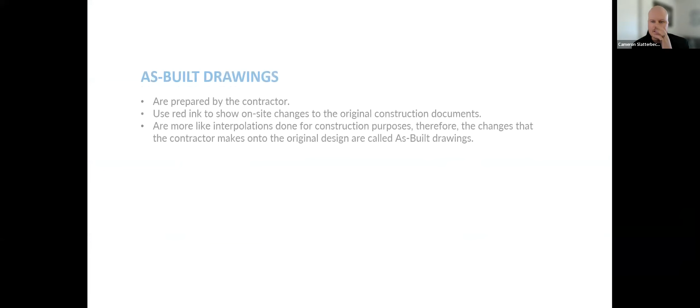Some common definitions. When looking into the actual definition of as-built plans, what one will most likely find is a definition that concerns as-built plans being created after or during new construction or after or during a renovation. They're prepared by the contractor, who potentially uses red ink to show on-site changes to the original construction documents. They're more like interpolations done for construction purposes. Therefore, the changes that the contractor makes onto the original design are called as-built drawings.

And then we have record drawings. Contractor developed as-builts should not be confused with record drawings created by you, the architect or engineer. Record or archive drawings often include the information gathered on as-builts and are the final set of formally developed prints, fully signed and stamped by the project engineer. This definition reads that they're prepared by the architect or engineer, and they reflect on-site changes the contractor noted in the as-built drawings, often compiled as a set of on-site changes made for the owner per the owner-architect contract.

And this set isn't always mandatory. It's not necessarily created, but in general, some formal architectural services create these as one of the last tasks of a building project.

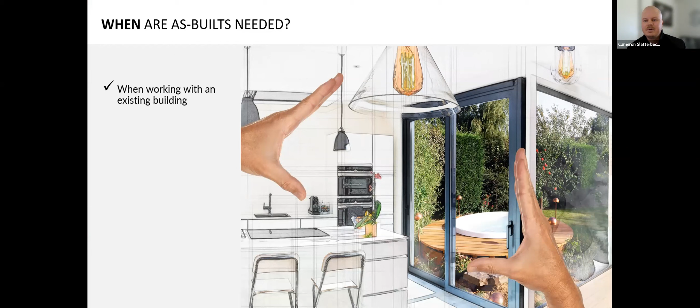So when are as-builts needed? What are the contributing factors? Pretty much whenever we're working with an existing building, we need as-builts before starting design. Also, when existing plans are determined to be unreliable, you'll probably need as-builts. Also, when there are no existing plans. And then finally, maybe if you work in a particular software and existing plans only exist in paper format.

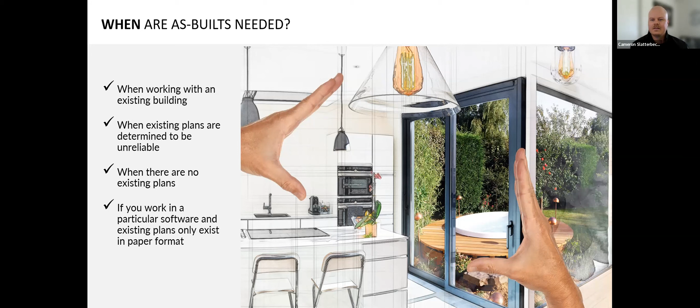If the owner or client happens to already have as-built drawings, then we may just need to enter those into CAD or reformat them if they're already in CAD, and confirm that the drawings are up to date. If errors or inconsistencies are found, which we've found is quite often, then at some point you may just decide that a fresh set of as-builts is needed.

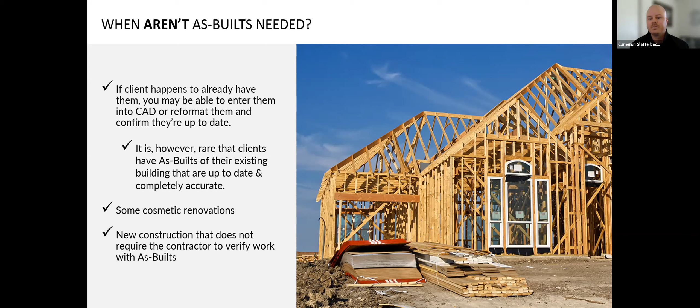And now, when aren't as-builts needed? It is rare that clients already have current as-builts of their existing building that are accurate, as I mentioned before, but it does happen. In that case, of course, you would not need more before starting your project. There are also simple cosmetic projects that don't require having accurate as-built plans. And of course, if your building is being built from scratch, then all you need are those new construction documents.

And so when is the best time to obtain as-built plans?

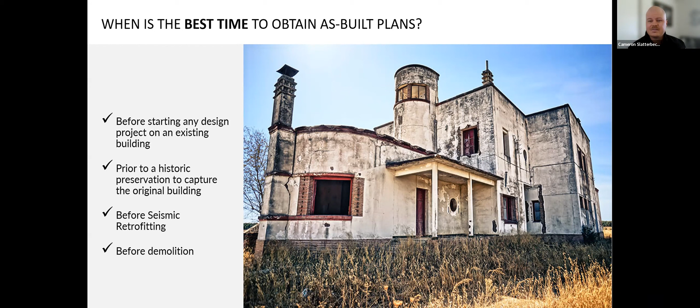In most cases, obtaining as-built files is one of the very first steps in the renovation process, if not the very first step. Getting ahead of this step allows an architect to focus on the design, plan creation, and submittal to the building department, all of which are considerably more time-consuming than that first step.

There are also cases where you'll be working with historical review or something similar, and they'll require as-builts to be created. Most engineers will want a fresh and accurate set of as-builts before they begin, say, a seismic retrofit project. If you're working on a teardown project, some building departments even require you submit as-built plans of the structures being demoed.

Overall, the size and scope of your project will determine when as-builts are needed, and as we'll discuss in the next section, to what degree the detail and scope of as-builts are required.

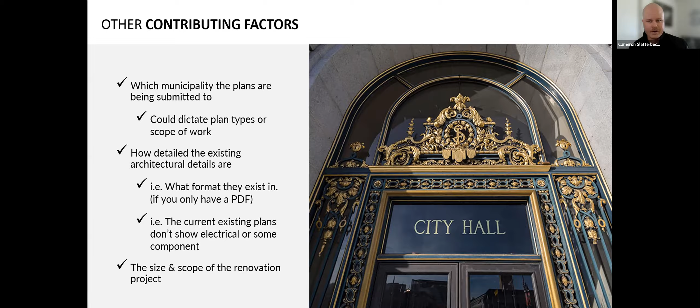So you've discovered that as-builts are needed. You're going to need those as-builts. So how far, or in how much detail, do you now need those as-builts or that information to go?

Above are a few examples of plan types and when they're needed in your as-built plan set. You might need floor plans — you almost always will need that as a base plan to work from.

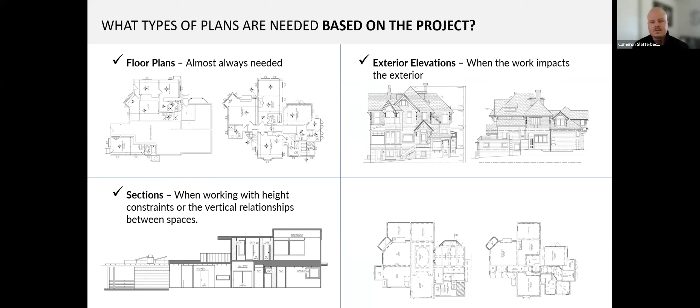You might need exterior elevations when the work impacts the exterior facades of the building or structure. Sections are also common when you're working with height constraints or vertical relationships between spaces. Finally, one of the more common plan types is reflected ceiling plans — when you're modifying the existing lighting or working with unique ceilings, that's definitely common.

Ultimately, it's up to you as the architect to decide what the scope should be for your as-built plan set, or consult with your engineer as well on what is needed.

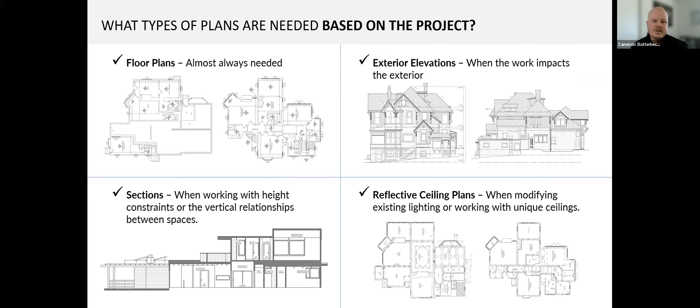Before we get into specifics regarding plan types, let's go over some of the ways to gather on-site information, starting with a very simple, quick method, and ending with full-blown as-built plans.

So now we know what we need, we know why we need it — now, how do we actually get it? The first potential step would just be getting photos only. One way to obtain the answers you need on site before renovation is by simply taking those photos. This can assist in the design process and answer questions you might have before proceeding.

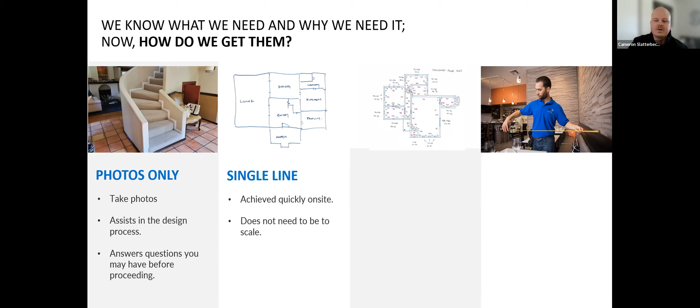Next up would maybe be a single line diagram. Sometimes a quick single line, or even a bubble diagram, is all you need to achieve your goals. This can be achieved quite quickly on site and doesn't necessarily even need to be to scale.

Beyond that would be sketching. Sketching can be very helpful in supporting your design. In the case of interior elevations or perspectives, this can also be done roughly and may not require measurement.

Finally, measuring. If drawings need to be to scale, such as when they'll be used to create construction documents, then you'll need to go to a higher level of accuracy and measure the existing conditions entirely. How you get these measurements can vary quite a bit, as you'll see throughout this presentation.

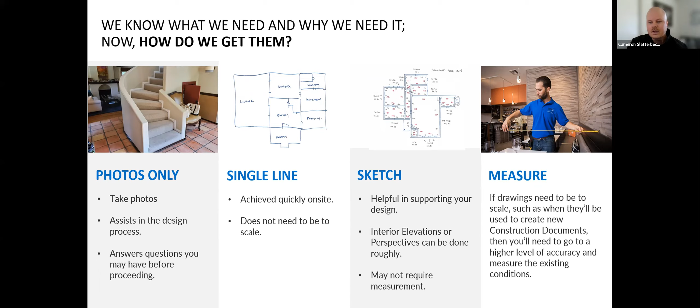Most remodel projects require a more detailed scope for as-built, which will give you a head start in the creation of your design, submittal, and construction documents.

To sum up the first portion of the presentation, chapter 1, understanding as-built plans: as-built plans, simply defined, are a set of plans of any structure as it exists at that moment. They're most often used for a renovation of some type.

Also, getting as-built drawings in the format in which you work is incredibly important, such as a particular software. Finally, the scope of the as-built plans and the detail of each scope item will vary with the needs of your project.

Now let's jump into chapter 2, which is going to touch on traditional surveying methods. We'll talk about an as-built production method that's near and dear to many of our hearts here at PPM. This is how we started 20-some-odd years ago, and that is sketching.

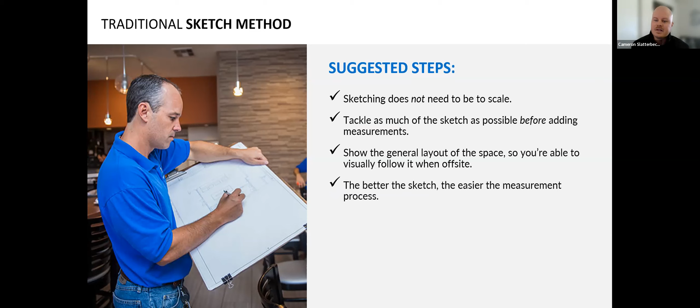So here's how you might sketch. Remember that sketching does not need to be to scale. All you need to do is make sure there is room to write all the measurements you need, and that it is visually easy enough to follow back in the office. Using different colors to mark different measurements and drawing types is helpful, so your eye will catch each segment accordingly when drafting, and you don't spend as much time hunting around the sketch for what you need at that moment.

Getting as much sketching done as you can before measuring is highly recommended, so you can just focus on measurements when the time comes and simply execute that. The better your sketching is, the easier your measurement will be. If sketched correctly, any structure could be measured much quicker.

Leave room to write in measurements. That's a big one. So plan ahead also to get your heights or measurements on the Z-axis. Most of the time, this information can still be displayed in plan view, but occasionally you'll want to sketch in section or elevation view as well. We'll talk about that again in the next few slides. And finally, sketch out any details or ornamentation to the degree of precision you desire, to be able to add measurements later on.

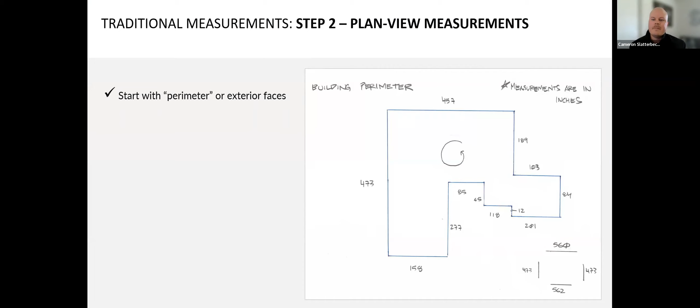So now it's time to add measurements to your sketch. An important step that many people skip when measuring a structure is going around the exterior faces. We find this incredibly crucial. Oftentimes, a wall thickness at an exterior wall is taken and then you simply move right onto the interior and take those interior measurements from there. But we consider this exterior footprint measurement to be extremely crucial.

A quick tip with this, as you see on this sketch in the bottom right corner: check your work, add up all the X values and all of the Y values. If you sum up all the X values on each side of the building, and those add up to the same number, or at least very close, then you're on the right track. As you see, that says 560 versus 562, and then simply do the same for the Y values as well.

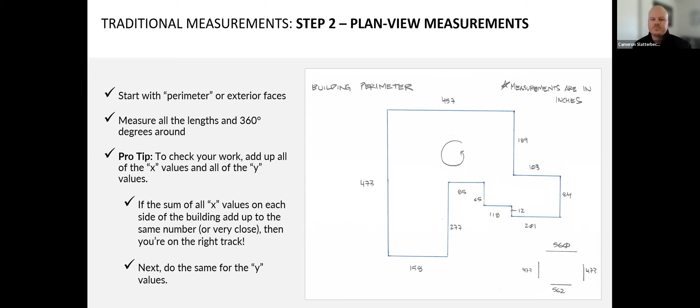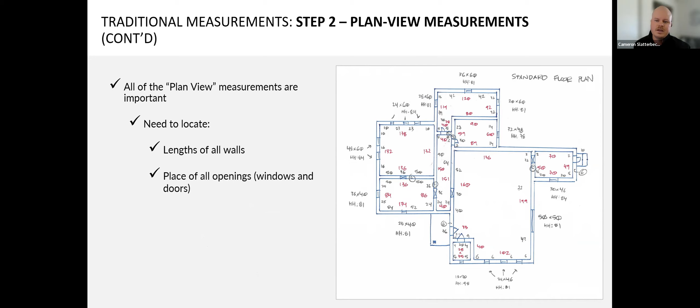Now in this sketch, you may notice there are some overall measurements as well as small incremental measurements. This is a good system of checks and balances that will not only improve overall accuracy, it may save you in the event you have an incorrect measurement or notation.

Don't forget to get good photo coverage as well. That'll help you verify that what you are drafting is indeed correct. Occasionally it happens—we've seen errors that do happen, or appear as errors or don't appear as errors on paper, but then become very obvious when you fact check or verify that with a photo.

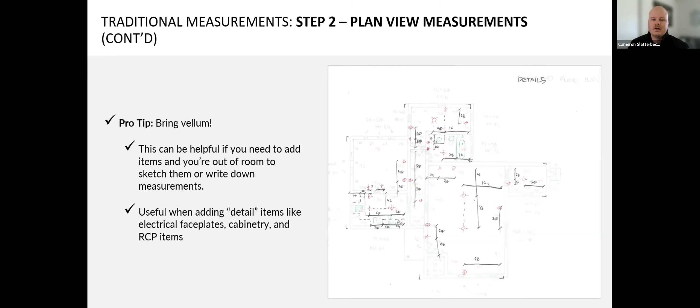This can be super helpful if you need to add items and you're out of room on that previous sketch and need to write those down. Or it's also useful when you're adding detail items like electrical faceplates, cabinetry, RCP, things like that.

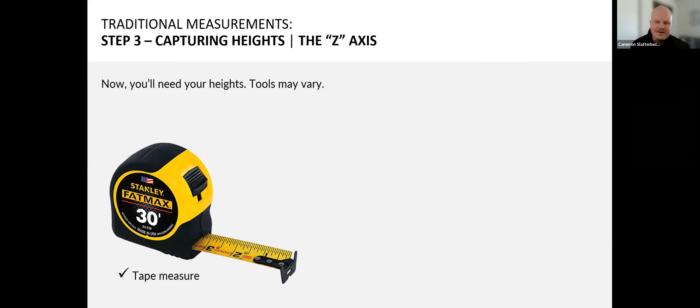So the Z-axis—now we can talk about collecting those height measurements or height information using traditional methods. This one's pretty obvious: you can use a tape measure to measure all the risers and the stairs, drop it down a balcony, run it up a wall, etc. We've all used that. A laser distance meter or disto can perform trigonometric functions instantly and get you heights in all sorts of ways. These first two, of course, are tools you might already be using to measure all other aspects of your plans. But the third is used exclusively to gather height information, and that is the zip level.

This is an excellent tool, invented, distributed, and repaired if needed by a company out in San Diego. I'm actually not even aware of any other version of this tool, but it basically uses displacement to read heights anywhere within a 50-foot radius. Super helpful when you're getting that height, Z-axis information.

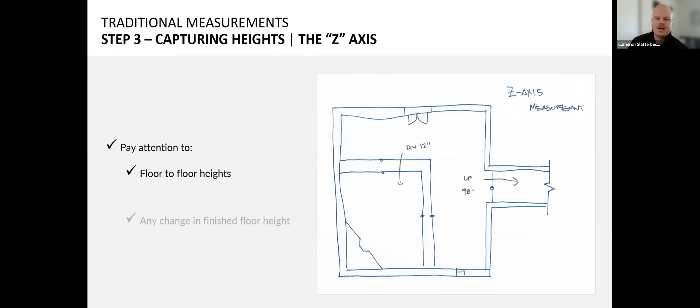However you collected your height measurements, make sure you got them in the places that you'll need them. Most of the areas will be obvious, like the tops of any steps, staircases, floor transitions, things like that.

Plan on what you'll need to see in those exterior elevation and section views. Make sure you have either some basic height and pitch information for your roof, or if it's safe to actually get up on the roof, gather as many height measurements as possible while you're up there.

Make sure not to forget the heights of openings such as windows in areas you plan to show, or the heights of items like wall sconces if you plan to produce detailed interior elevations.

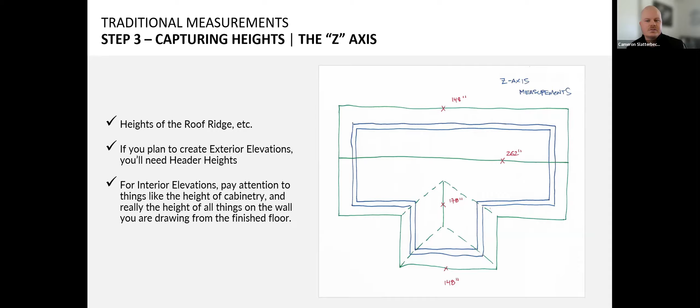To sum up the second portion, traditional surveying method, overall, having the perfect sketch isn't even all that important. What you need is a sketch that displays and contains all the measurements you'll need for the drafting phase. You need to encapsulate the structure by measuring around it. This will give you the scale when you begin drafting and ensure your interior measurements are correct as well.

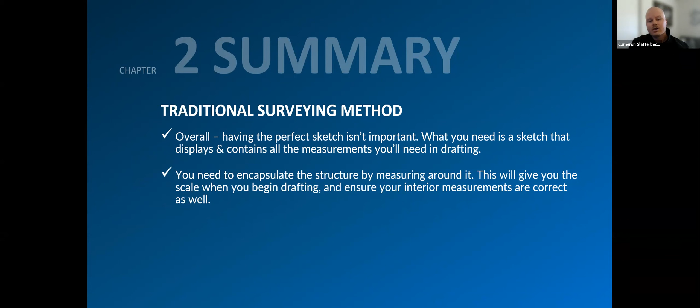After taking the measurements of major items like walls, doors, and windows, go ahead and move on to the next level of detail as needed. This can be for cabinetry, plumbing fixtures, electrical, ceiling components, etc.

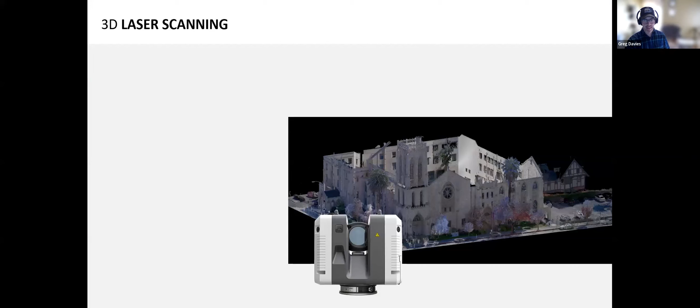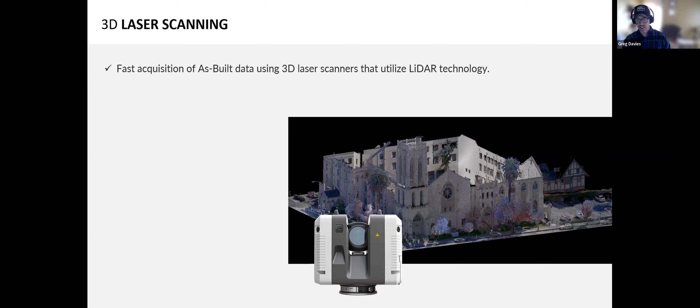Updating or even replacing a proven method for doing something to utilize the newest technology is not easy, no matter what industry you're in. The first step you take is always the most important, and the rest is just hard work and diligence from there. Even though it may be difficult to transition, making the change to laser scanning as a survey method provides you with fast acquisition of as-built data using 3D laser scanners, and more accurate measurements than can be taken by hand, primarily just by reducing the odds of human error in the field.

Technology can be purchased, rented, or even contracted as a service. It's a thorough solution that allows you to gather more data than needed to complete the drawings and models. And it provides you, even after you finish the drafting, with a digital twin of any property that allows you to essentially visit the site from the comfort of your office and pull up additional data if the scope of the project changes or you need additional info.

After scanning hundreds of individual positions with good overlap between all of them, you can bring all of the data into one big data set for your project. Now, the mobile scanner allows you to get a similar end result. It gives you that full 3D picture, but by utilizing an algorithm called SLAM, which stands for simultaneous localization and mapping, the scanner and accompanying software allow you to gather the 3D data while simply walking through a space. As you can imagine, this dramatically reduces the amount of time to capture the data in the field.

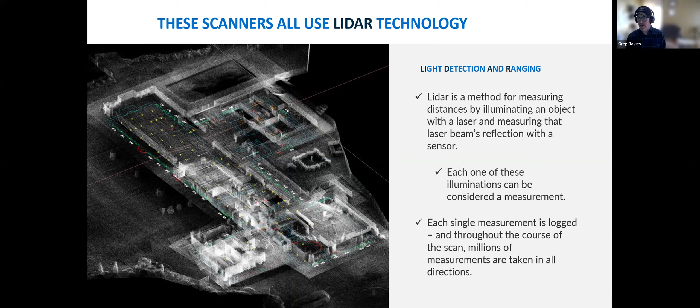So first, let's talk a little bit more about a terrestrial scanner that we have used in the field. It's not our standard, but it's something that we've used in the past. And then we'll talk about our preferred scanner.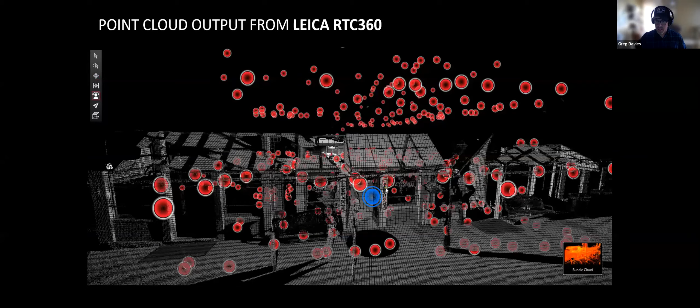This is an example of the point cloud output from the Leica RTC 360. This was a survey done of the Easy Street Casino in Central City, Colorado, I think is what it's called, the gambling town in Colorado. As you can see, you can navigate through this 3D space by clicking on the different positions that the scans were taken from. Even though there were no photos taken during the scan, you can see that you have very photorealistic information in this scan, which is extremely helpful when producing detailed as-builts, because it helps us really see and get the context of where we're at within the data.

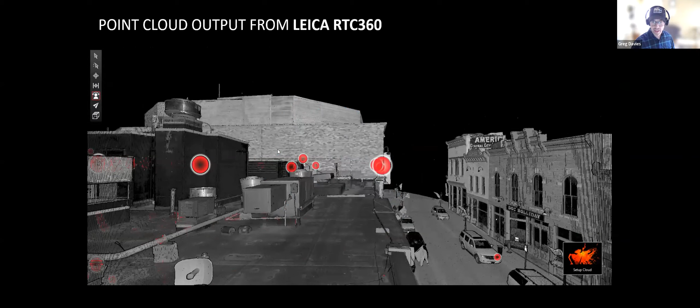So those terrestrial scanners, they make great looking data, but I'd also like to talk about the scanners that we're most familiar with here at PPM, and those are the mobile scanners.

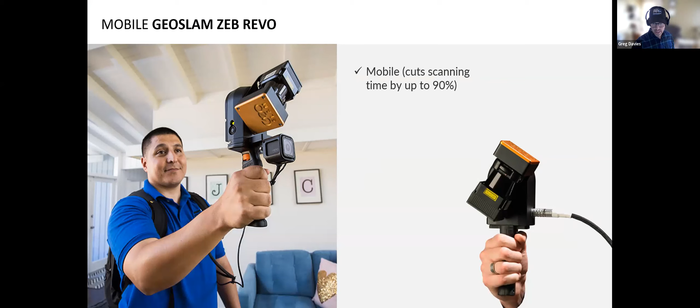So the mobile GeoSlam Zeb Revo, the trade-off for a less colorful point cloud or a lower level of precision is that with a mobile scanner, you greatly reduce the amount of time that you spend on site taking measurements, because scanning is done continuously while walking through a space and does not need to be mounted on a tripod. Even stacked up against the Leica scanner we just discussed, 3 hours of scanning can be cut down to 15 minutes with a mobile scanner like this one. These scanners are also very modular. You can mount other equipment to them, like a GoPro camera, or you can even mount the scanner itself to a drone.

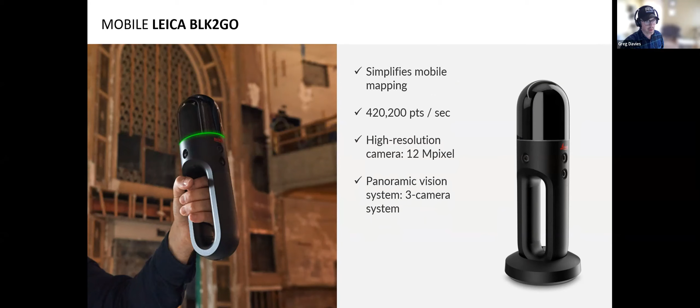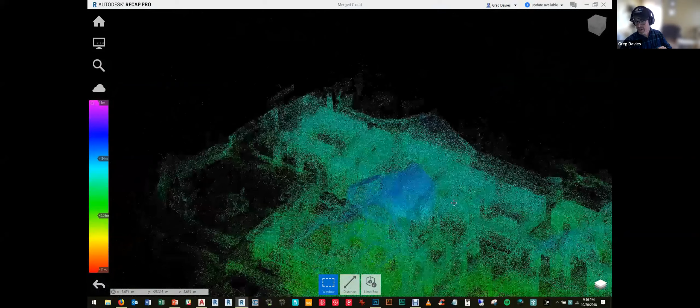This one is taken of a large residential property, and you can see that even though there is no photo-based colorization of the points, these points are colored on what's called a height ramp, where points at different heights are shown as different colors on a spectrum, which you can see on the left. Red is a lower height, blue is a higher height. So coloring the points this way makes it easier to see important features in the point cloud, even without that photo colorization.

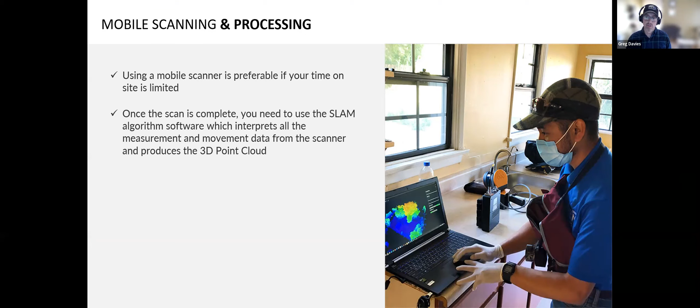To wrap up using mobile scanners in the field, using a mobile scanner is preferable if your time on site is limited, which it almost always is. Once the scan is complete, you need to use the SLAM algorithm software, which interprets all the measurement and movement data from the scanner and produces the 3D point cloud. Since most individual scans take only 15 to 45 minutes, this will give you time to process the scan on site.

Reviewing your point cloud on site is essential to ensure accuracy. Most errors in scanning or processing can be spotted quickly, and actions can be taken to ensure the overall accuracy of your project when the time comes to draft your model.

We've talked a lot about this point cloud, but let's talk a little bit more about what it is and what to look out for before bringing it into your favorite CAD or BIM software.

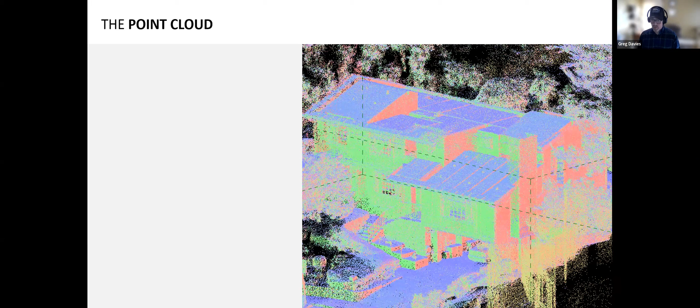Reviewing your data very well before attempting to create a set of as-builts from a point cloud is an absolute must. If there are any kinds of errors with your cloud, which do happen, using the bad data can either stop you in your tracks when drafting or modeling, or even worse, result in an incorrect set of as-builts. So once your scan is processed, you'll need to review the output.

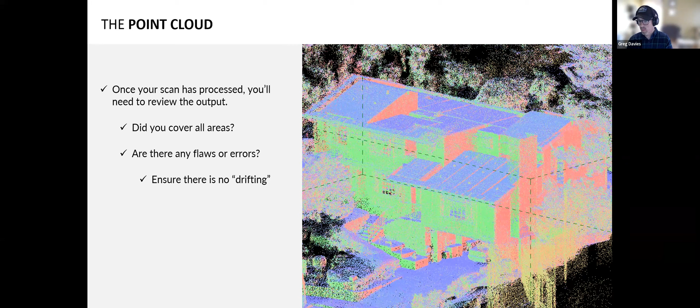You want to check to see if you covered all your areas. Did you miss any closets or bedrooms or any areas at all? Then you want to look for flaws or errors in the data. Sometimes you see some ghosting and something we call drifting, which we'll take a look at a few examples of here.

Here's a great example of some pretty massive drift. This can occur when the software has trouble putting all of those individual measurement points together. If this occurs, you can try some reprocessing options or simply scan the structure again. Determining the reason for the error is crucial to informing your decision on how best to reprocess your scan, your point cloud, or rescan your project.

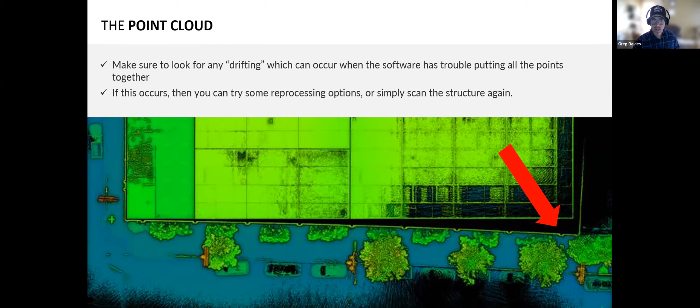Here are some other examples of drifting. In this case, we're looking at a bathroom, and the bathtub on the left is incorrectly showing itself to be in the kitchen area. Unless they designed this house to have a bathtub in the kitchen, we're pretty sure that's not actually accurate data. Also, the vanity on the right side isn't in line with where it should have been, as you can see from those red arrows indicating that.

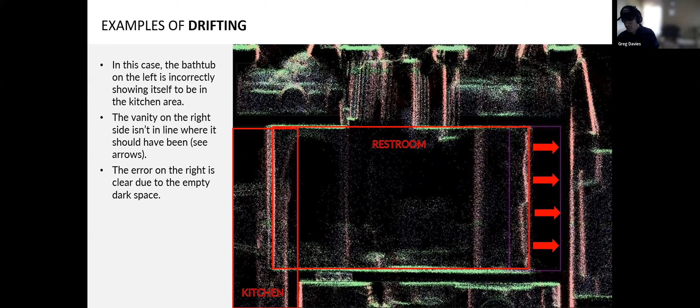The error on the right is clear due to that empty or dark space. Even though plumbing walls are usually a little bit wider, they're usually not that wide compared to the rest of your walls.

This is another more unique example of drifting, and we've been seeing that this perhaps indicates an issue with the scanner itself. Heavy drifting that kind of rotates a space within what clearly should be a basic rectangular room is an indication that something might be wrong with your scanner, or something just might be wrong with the way the project was scanned.

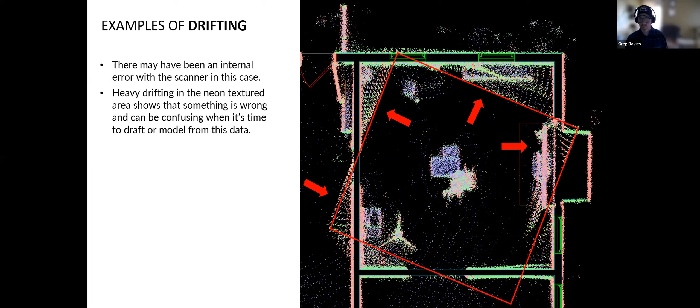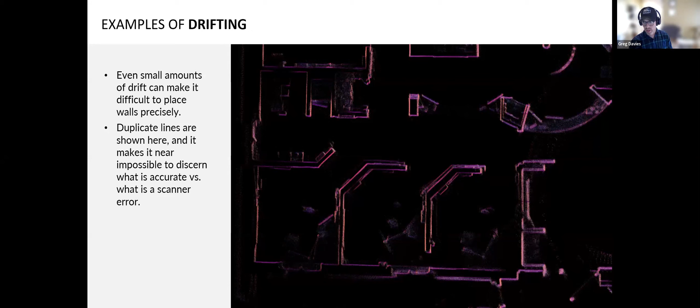The last example of drifting: even small amounts of drift can make it difficult to place walls precisely. Here you can see there's some duplicate lines around where the walls should be, making it near impossible to discern where exactly those lines should be placed when you're doing your drafting.

Some scanners are better than others at different types of projects. There's a tool for every job, but all scanners can run into some challenges creating good point cloud data in certain field conditions. One of those conditions is changing heights.

When scanning attics, foundations, large sites, or multi-level structures, you may run into issues getting your vertical data to all fit together, usually because in order to relate one set of data from one floor to another, you have to go through a very small spot to do it. So you just run out of as many significant features to help stitch everything together.

Also, areas that are hard to access, that have lots of reflective surfaces, can also create a lot of issues. Big open areas like the one pictured here with repetitive features can sometimes cause some troubles, and you've got to scan carefully to make sure you get that accurate.

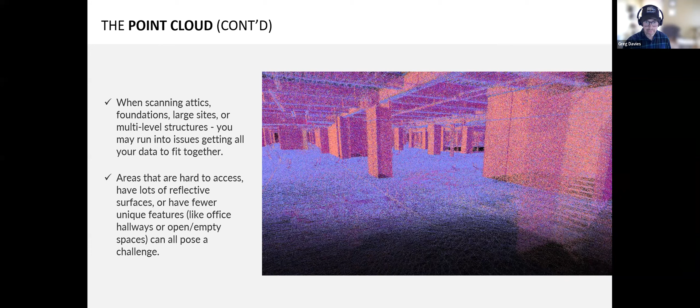So most scanners have a range of hundreds of feet, and this can produce a lot of data outside of your project that you don't need. You may need to clip or crop your point cloud to reduce the overall file size by getting rid of this unwanted data.

If you have to produce multiple point clouds for a large or complex project, it will be important to get comfortable with point cloud software that will allow you to merge or register your clouds and manage your data more easily.

Much like the traditional method of sketching and measuring, properly scanning a structure takes a lot of practice to do correctly and efficiently. But once you are practiced with scanning and know what to look for and where errors may have occurred, you will have the most reliable version of data that you can gather in the field.

You can be confident that the as-built plans you create will be fully accurate and ensure a smooth and safe renovation as it progresses.

Okay, so you've gone out in the field, you took your fancy laser scanner out there and you have a point cloud, but now what do you do with it?

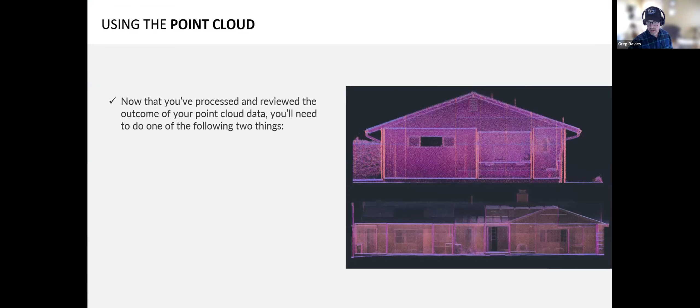Now that you've processed and reviewed all of the point cloud data, you'll need to do one of two things: one, do it all over again if it came out poorly, or two, bring your point cloud into your drafting modeling station to get started with the next phase.

From there, as you can see in the pictures, you want to cut slices of your data, view it from all directions to start looking at how to produce your plans.

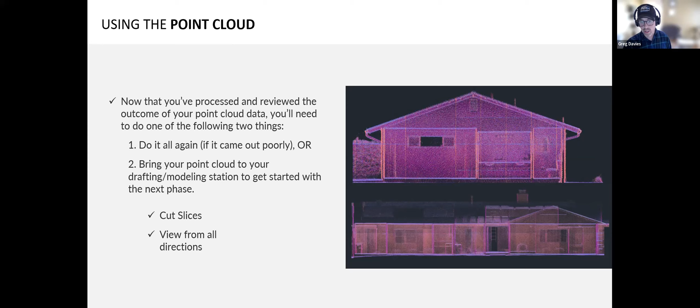In order to produce them, or in addition to cutting these slices, you'll want to be able to move and rotate the clouds to get any viewer perspective you need on the property to be able to perform your work. While there certainly is a learning curve, any CAD or BIM software that supports point clouds can do this for you easily.

So we're going to get into creating the as-built set in our next section here, but I have some slides that can display just how you can get acclimated with the point cloud with the photos you've taken on site.

If it was safe enough to get up on the roof with the scanner, then you're in luck and you'll have some excellent data to work with in your drafting and particularly your modeling. It's always good to have photos open while you do this, regardless, to ensure that it's correct. Scan data from inside an attic can also be very useful in displaying the behavior of a roof.

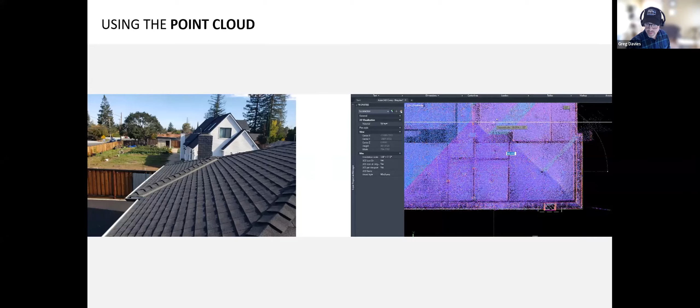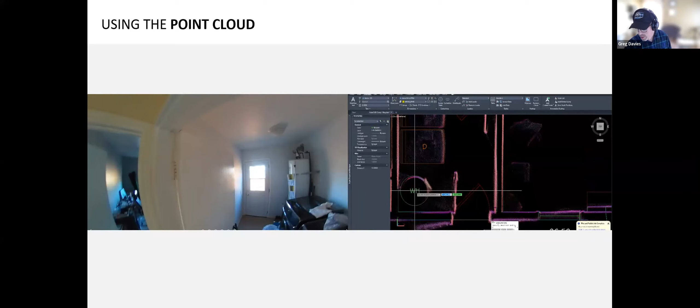And here, there's always opportunities for point cloud data to fool you. Here, it's not clear which way this door actually swings into the laundry room. So a photo seals the deal.

Looking in section view in the point cloud throughout the project, or even before you start your work, is always a good idea. You'll be seeing the structure in a way that you can't really see it in person, unless you happen to have the biggest chainsaw ever and permission to use it to cut through the home.

Having this point cloud data is extremely beneficial over measuring with traditional methods when sections need to be created for the plan set as well.

All right, so in summary on the 3D laser scanning: first, scanning your project will prevent costly revisits to site due to errors and will reduce your time spent on site. The type of scanner you use will be dictated by your needs and level of detail required.

And your scanner will create a cloud made up of millions of points. Knowing how to manipulate the point cloud in your preferred drafting and modeling software is crucial to using your surveyor data. As an added note, while LiDAR has been around for about 20 years, more and more as-built surveys of all types are shifting away from the traditional methods to using the latest in laser technology.

As with every new production method, there's always a learning curve, but once mastered, the entire process gets much smoother. When incorporated with BIM technologies, the entire construction process can get a boost in speed, efficiency, and have a lesser environmental impact.

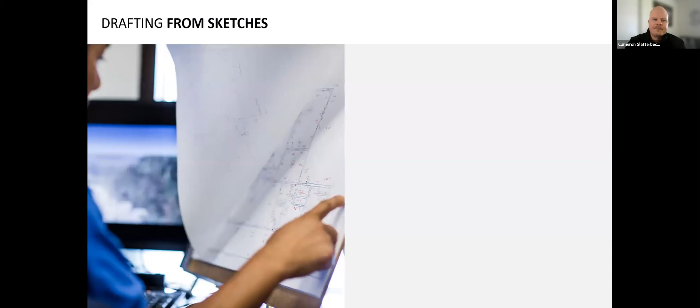So drafting from sketches: prop your sketch next to your computer and just fire away. It's a pretty straightforward process. Use a vector-based drawing software and draft to full scale, entering actual measurements from your on-site sketch.

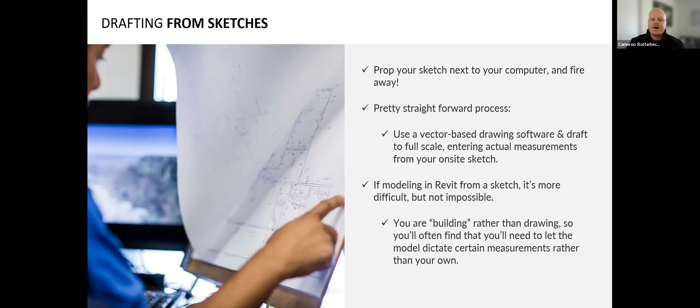If you are modeling in Revit from a sketch, it's more difficult, but not impossible. In this case, you're more building rather than drawing. So you'll often find that you need to let the model dictate certain measurements and override the ones that you took on site.

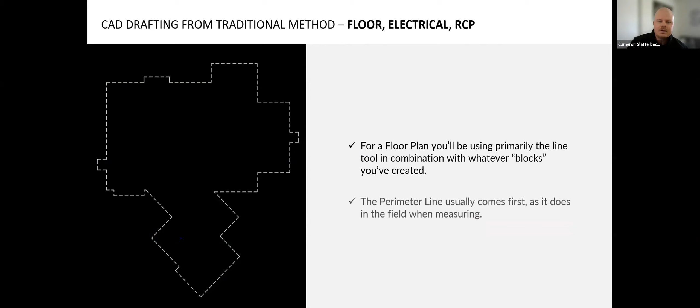So for a floor plan, you're going to be primarily using that line tool in combination with whatever blocks you've created. The perimeter line usually comes first, as it does in the field when you're measuring.

Starting with interior plan types, you want to draft your walls first, then go on to windows and doors. If there are multiple levels, you'll not only need to draft using your measurements, but also be very cognizant of those stairwell walls and exterior faces of the structure, to make sure that they are lining up exactly as they very likely do in real life.

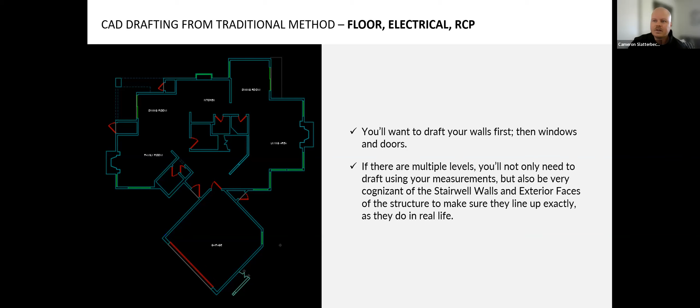Once those controlling items are done, you can draft in with perhaps a lesser degree of precision the cabinetry, plumbing fixtures, appliances, etc. For an electrical and RCP, it's much the same. Follow what you've sketched and measured and add the items one by one.

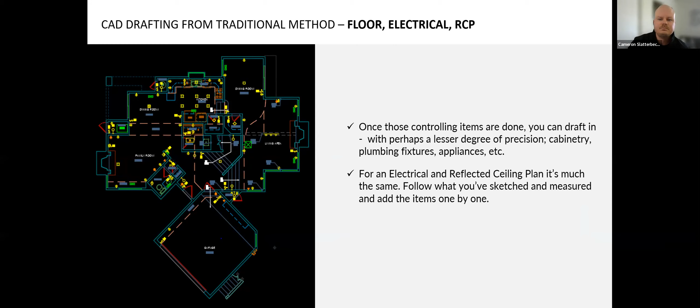For roof elevation and section plan types, you'll need to have at least sketched the behavior of the roof correctly in the field, or by using a nice clear satellite photo at the very least. This means all the hips, valleys, ridges, and the direction of any slopes. This, and the measured length of all overhangs, should get you to a place where you can draft the roof in plan view.

On the same roof sketch, you'll need to have also collected all the height information. This is often achieved by using a zip level, which I mentioned a bit ago, and getting on the roof to take all necessary height readings. That said, there are other methods, such as using an angle finder, level, or using various functions of a disto laser, that can get you that information.

Any decorative items that you sketched and measured can be drafted as well at this point. Drafting a roof and elevation view is one of the most difficult challenges in drafting an as-built plan set, and it needs to correspond perfectly in all those other elevation views.

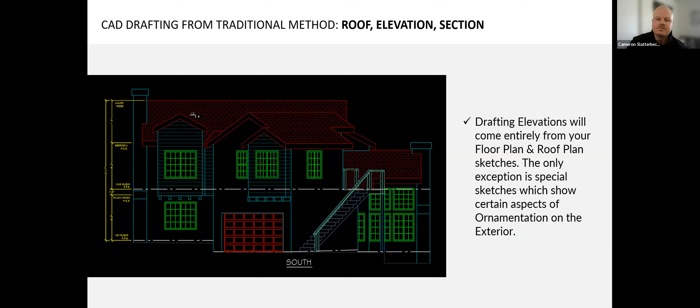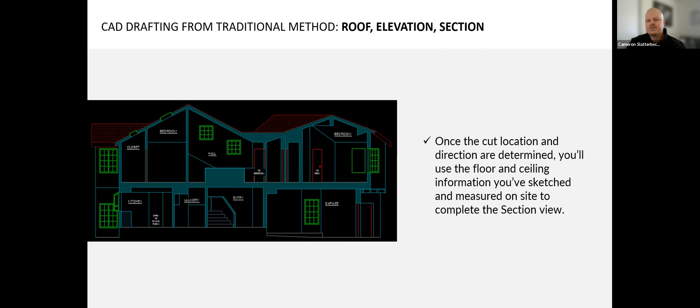When we're talking about sections: once the cut location and direction are determined, you'll use the floor and ceiling information that you sketched and measured on site to complete the section view. To draft the roof properly in section view, it's highly advised to have your elevation drawings already finished, in order to use that same exact information to complete your section drawings.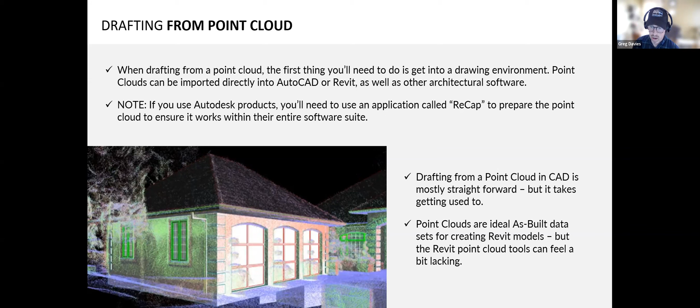So first, we can talk about drafting the plan view items from a cloud. When drafting in CAD from a point cloud, you'll want to ensure that your cloud is positioned orthogonally so that you can use the ortho function in CAD to very easily draw the lines. You'll also want to make sure that your cloud is on the Z-axis in CAD. That's desirable for several reasons. You should be able to derive all the walls, doors, and door swings right from the point cloud.

Window information can be found as well when you are skilled at reviewing point clouds. Many scanners will not pick up the smaller items, especially if they are flush with the walls or ceiling. So trying to locate them in the cloud can be very time consuming in that case. So it's often better to revert to the traditional method in the field to just sketch and measure those items, light switches, outlets, things like that.

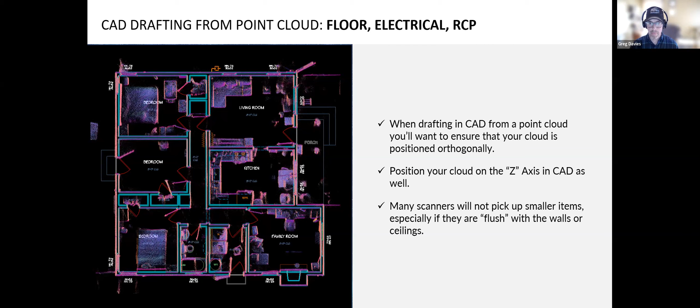So now let's get into drafting other views, such as an elevation from the cloud. This is where there's a huge advantage in having a complete point cloud for drafting. Provided that you are able to access the roof in scanning, you will have a complete picture of not only the roof behavior, but also every height that you'll need to properly draft your roof, your exterior elevations, and any section you might need. As with electrical and RCP components, sometimes it's beneficial to revert to that traditional method to sketch ornamental items that you'd like to include in your drafting.

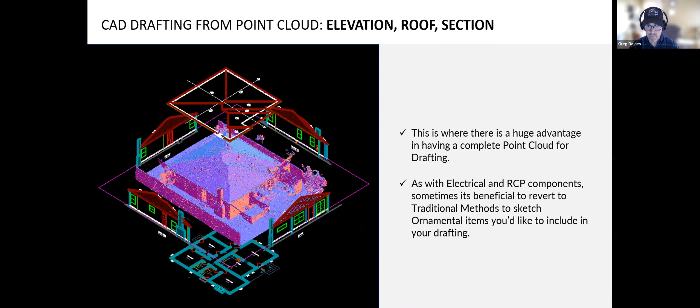So as I mentioned, while point clouds can definitely be used to easily draw 2D plans once you get a nice slice of that data, where they really shine is in creating a 3D Revit model.

Since Revit is an extremely powerful tool that can store information on every assembly within a given structure, the level of development system was created for the AEC community to describe different levels of BIM models and the uses for each level. So this set of standards gets into the precision, construction detail, and overall refinement of each set of objects in your model. On the simplest end, we have LOD 100, and that's just a single solid 3D mass of an object or even of an entire property, often used for like city planning and civil reasons.

Level 500 is on the most complex end, and it's so thorough that the model of the building is essentially a virtual version of the entire structure: nuts, bolts, bolt threads, bolt diameters, bolt lengths, washers, and all. So in modeling and as-built plans, somewhere between LOD 200 and 300 are the most practical levels for a light and usable Revit model. And even though laser scanners gather a lot of data, you're still assessing a structure from the outside. All of the interstitial spaces are inaccessible, and their construction cannot be assumed.

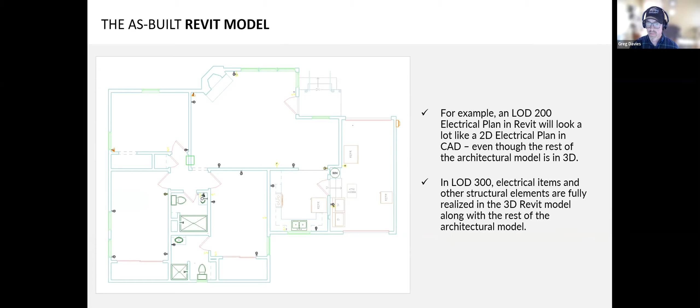So Revit has many tools to build site plans and topography if needed. If you only plan to model as-builts of a structure, you may want to limit your site work to the areas that surround or touch the structure only, if at all.

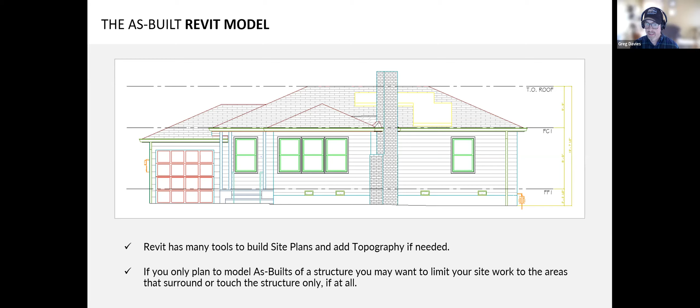Similar to drafting in AutoCAD, the first thing you need to do to work with a point cloud in Revit is to make sure it is in the ReCap project format for use with all of the Autodesk products.

Using the point cloud to guide modeling in 3D can be more complex than drafting in 2D. However, the benefits of having all elements of a building related to each other in 3D can be extremely valuable to your design and planning process, as seen here in this power plant in Oakland. All of the ways in which the 3D elements interact with each other, you just can't see that in a set of standard 2D plans.

Viewing the point cloud and model in 3D provides a lot more information about how structure, MEP systems, and architecture all interact. And then modeling an as-built in Revit may seem overwhelming at first, but a solid order of operations for creating a usable Revit model will go a long way.

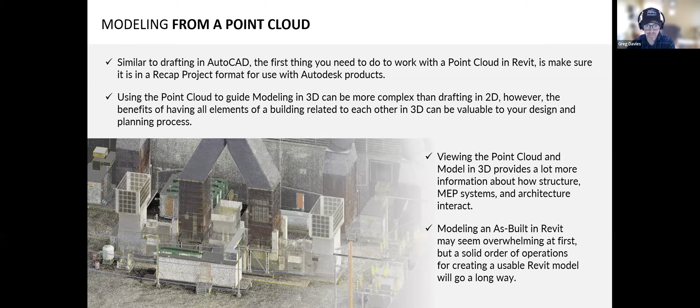So a little bit about that. Point cloud setup is extremely important. You want to rotate the cloud in plan view so walls are easy to place orthogonally, just like in CAD. It's important to set this orthogonally to create a usable Revit model, as Revit is not a huge fan of having walls set to 89.9 degrees.

Then you want to make sure you set the desired finished floor of the point cloud to your 0'0" level in Revit. Then set all other levels to key features in the point cloud, whether that's another level, a plenum, top of roof, etc. Much like we discussed with AutoCAD and the Z-axis, setting the point cloud to accurately line up with a vertical coordinate system is important for easily relating height data in your model.

So once you're done, start adjusting your view range and view depths in your plan views to add wall, door, and window families in the places indicated by the point cloud. Now, fortunately, Revit does some heavy lifting for us while we start creating the plans, which leads me to the next slide.

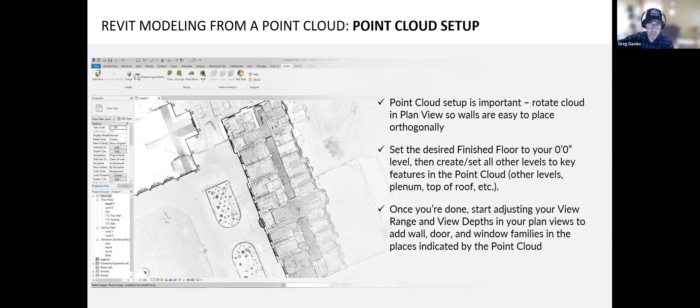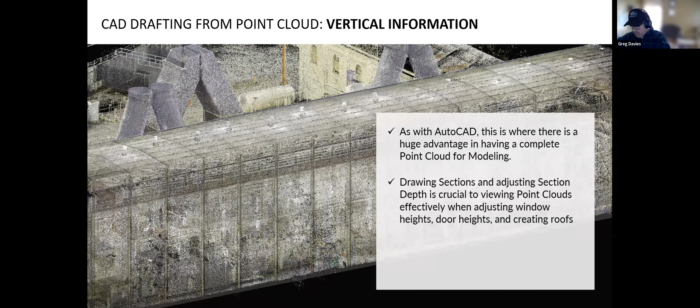So vertical information. As with AutoCAD, this is where there's a huge advantage in having a complete point cloud for modeling. Drawing sections and adjusting section depth is crucial to viewing point clouds effectively when adjusting window heights, door heights, creating roofs, etc. And as with anything, you have to practice patience when you're working on these things, especially for the first time.

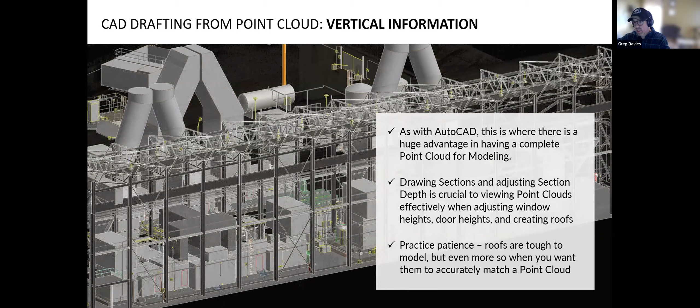As everyone knows, roofs are incredibly tough to model, but even more so when you want to make sure that you're matching them as accurately as possible to the point cloud. There's just so many little parameters that you have to tweak to get it just so.

All right, so some notes on the BIM process and as-built plans. BIM as-built and final models look beautiful. They're interactive, but there are many more advantages to having a BIM as-built than just the final presentation.

So the as-built BIM model can be viewed in multiple phases, so you can easily switch between existing as-built, demo, proposed, and alternate proposed phases.

Moving from the design phase to the construction documents phase of a project is far more efficient, mostly for the reasons listed above. Having an as-built BIM model can make it easier to understand a project that you haven't visited yourself, since you can cut sections, view interior spaces, and review the roof massing all in 3D.

Some say Revit offers a more intuitive design experience and allows users to present 3D images at the planning stages to the owner or to planning departments.

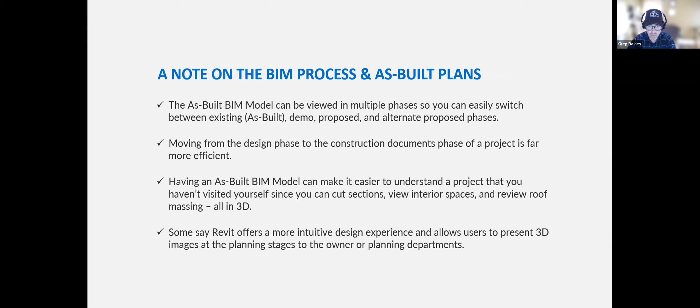Okay, to sum up this fourth and final chapter of this presentation, a summary on creating an as-built set from the 3D laser scanners. So drafting from sketches into CAD is a pretty straightforward process. It takes time to become efficient, but you'll just be entering measurements into CAD straight from your sketch sheets.

Modeling into Revit from sketches can be done, of course, but you may find during the modeling that you'll need to ignore certain measurements in lieu of letting the powerful software just build the model properly.

Drafting from a point cloud on both CAD and Revit means that you'll be importing the point cloud itself directly into the software and essentially tracing or placing components right on top of the cloud to create your set of plans. And with that, I am done.

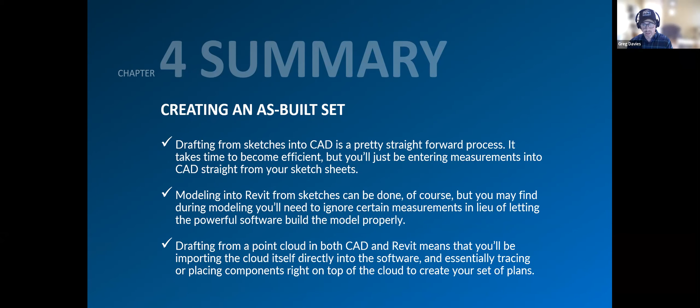Thank you, Greg. That does conclude the presentation. I did want to ask one last question. I see some questions that may pertain to you, Greg, in the chat, so we'll get to those in the Q&A portion. But real quick, I had a question.

Share your answers in the chat here: approximately how long would it take your team to measure and draft a 1,500 square foot single family residence? Let's say a floor plan, a roof plan, and elevations are included. Feel free to add your answers.